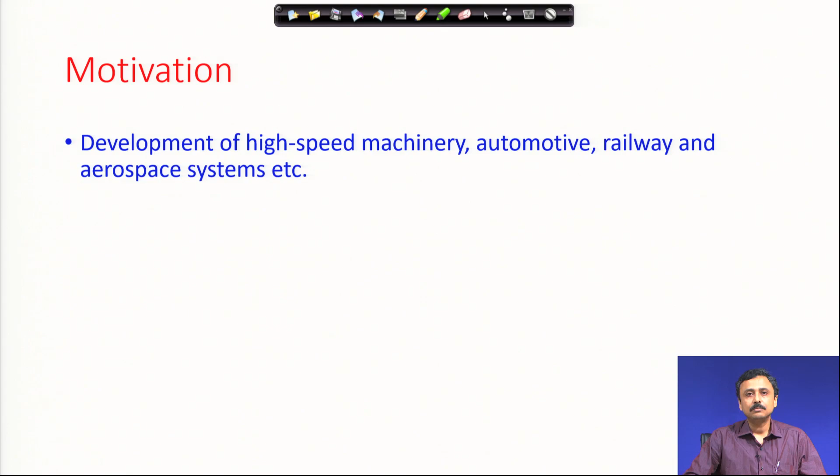The first question that must come to your mind is why should you do the course? Let me try to motivate you a little bit. You already know that we are trying to achieve high speed in everything that we do, in high speed railway system, high speed cars or high speed machinery. We have substantial dynamic effects and we must know how to model this dynamics, how to find out the dynamic forces and hence have improved design or understand the behavior of the system when the system moves at very high speeds.

So, this is very essential in design of high speed machinery, high speed automotive systems, high speed railways and aerospace systems. We need this calculation of dynamic effects or dynamic forces for proper design. Now, this is an engineering reason or engineering aspect to studying dynamics, why we should study dynamics from the engineer's point of view. But there is another reason I can tell you for which we must study dynamics, that is

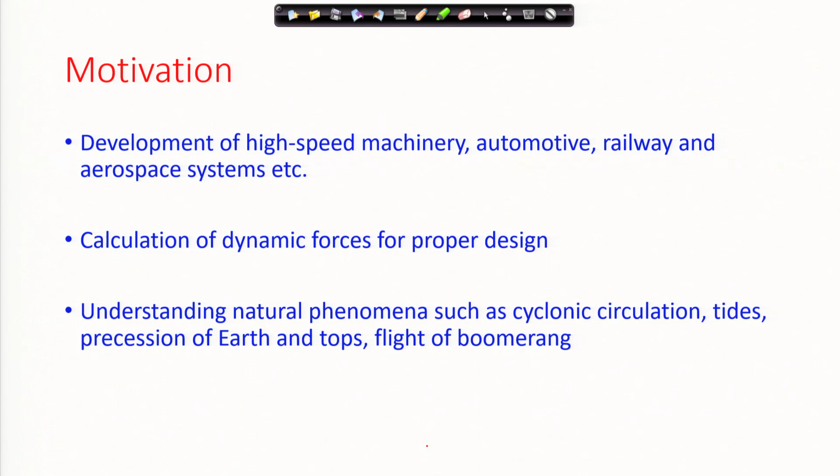to understand natural phenomena such as cyclonic circulation, how cyclonic circulation builds up, why do winds suddenly start a cyclonic circulation, when a low pressure is formed why do they start a spin, why do tides form, how tides are formed due to the attraction of the sun and the moon, how does it work out, what are the kind of forces that act on the water that forms tides.

Then the precession of the earth or the precession of the boomerang, why a boomerang returns back to the thrower if it misses the target, how tops precess, how earth precesses. These are the things that can be analyzed by knowing dynamics or studying dynamics. Without understanding dynamic forces, especially rotation, you cannot answer some of these questions.

Now, what are the prerequisites? Let us look at the prerequisites for this course. You must have gone through a course in undergraduate mathematics and undergraduate mechanics. These two are essential for this course.

Let me give you an overview of the coverage, what I am going to cover in this course. The coverage can be broadly divided into three parts. The first part is Newtonian dynamics for particles, second is the Newton-Euler dynamics for rigid bodies, and finally, we are going to discuss analytical dynamics formulation of Lagrange. I will start with kinematics. As you know, dynamics is a study of kinematics and kinetics. Kinematics is a study of motion without reference to forces, whereas kinetics is the study of effect of forces on particles and rigid bodies.

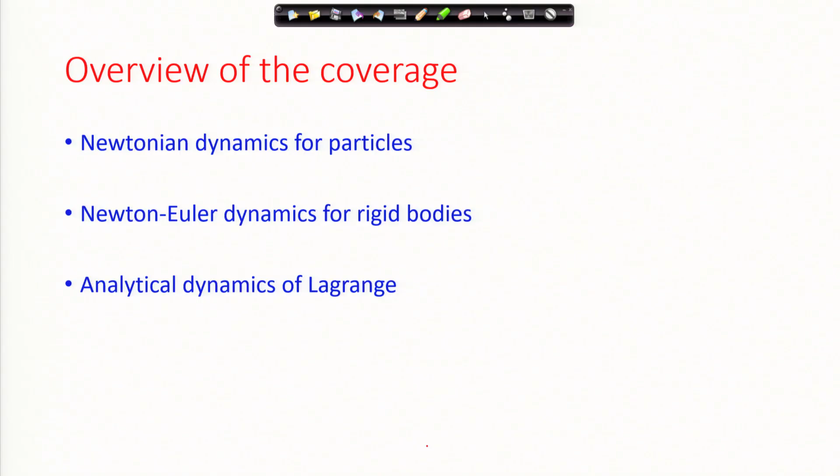This course will be a 12-week long course, which is a 30-hour course. There will be weekly assignments, and if you take this course, I strongly urge you to do these assignments, and then there will be a final examination for evaluation. So, these weekly assignments and the final exam will go into your overall assessment in this course.

A little bit about the lectures. In the lectures, I will explain a concept and also take examples to further demonstrate those concepts. So, I will take example problems, and when you are listening to these lectures, I suggest not to take notes during that time. You must understand the concept, and later on you should be able to repeat the problems yourself, and that will be real learning of the course.

Now, if you are convinced, if you meet the prerequisites, if you think that this course is going to be useful to you, which I hope it will be in building your fundamental concepts in dynamics, and you are going to take this leap to more advanced things, then I welcome you to this course, welcome you on board with me in this course.